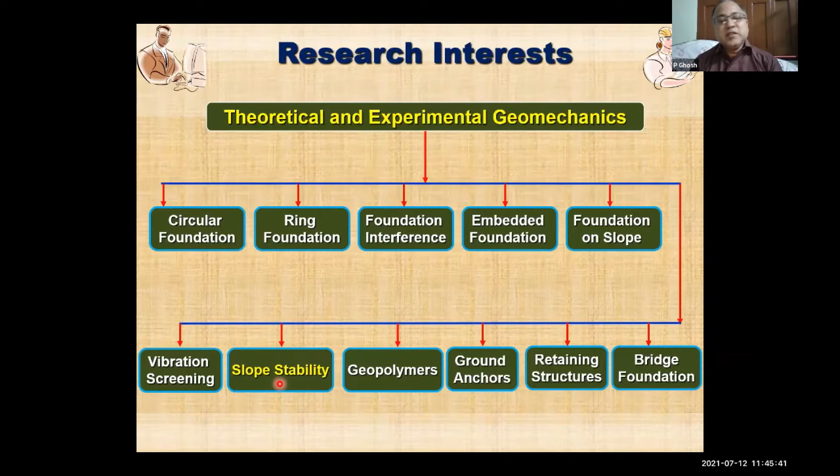I mainly work in theoretical and experimental geomechanics. Today I am going to focus on this topic, slope stability, where the slope is reinforced with micropiles. Now why this topic? What has motivated us to work on this topic?

The stability analysis of natural and human-made slopes under seismic condition remains a challenging task in the field of geotechnical engineering. As we all know, a lot of researchers are working on slope stability, and we know that landslide, slope failure, embankment failure, these are the part and parcel of a geotechnical engineer, right?

The failure of slopes under any condition may lead to tremendous loss to the society, which advocates for improving the soil to enhance the stability of slopes.

Out of various ground improvement techniques, there are several, such as geosynthetic reinforced ground improvement techniques, or chemical stabilization based ground improvement techniques. There are several techniques, right?

Now, micropiles can be adopted to enhance the stability of such slopes. Let's see how we can place it and get the enhancement in stability. Micropiles are generally found to be versatile, serving various functions such as seismic retrofitting and underpinning. The stability of slopes is expected to improve with the use of micropiles, but the study on the effect of seismicity on the stability of micropile reinforced slopes is limited. That has motivated us to initiate this work.

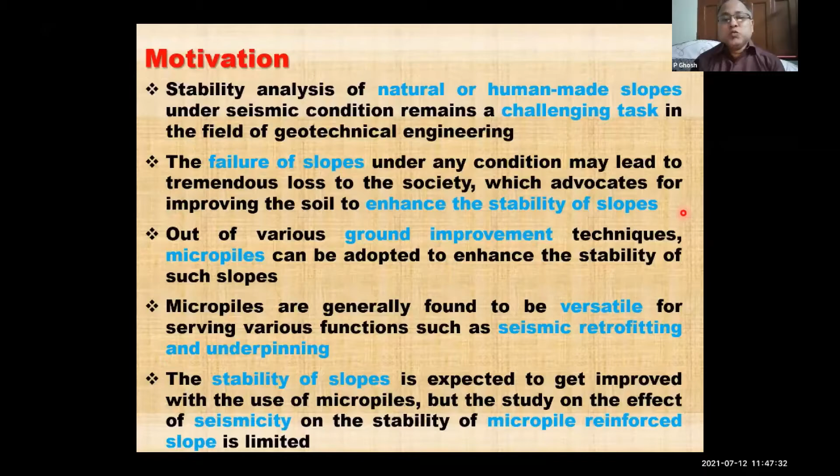Now coming to the problem definition and objectives of the present work. The problem definition is a finite slope of height H and inclination I, reinforced with vertical as well as inclined micropiles, considered under static and seismic conditions. The mechanical properties of soil include the angle of internal friction, cohesion, and unit weight of soil. So we considered both C and phi parameters—it is not a purely cohesive soil slope, rather it has both present.

The limit equilibrium method—we know there are several numerical techniques by which we can obtain the stability of a slope. However, we have used the limit equilibrium method for this study, coupled with the original pseudodynamic approach, which was originally proposed by Steedman and Zeng in 1990. Later, several researchers worked on that and improved the methodology. So these two things are adapted in the analysis.

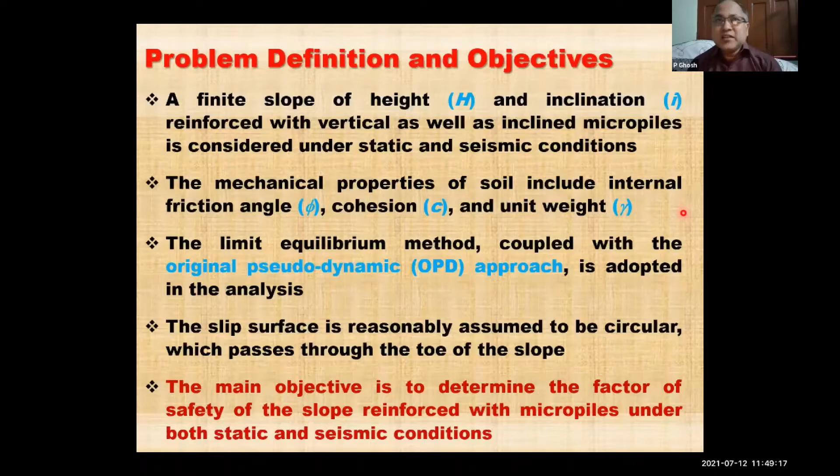The slip surface is reasonably assumed to be circular, which passes through the toe of the slope. So we are assuming that the slope fails through toe failure only. The main objective is to determine the factor of safety of the slope reinforced with micropiles, under both static and seismic conditions. This is the basic objective of the present work.

Now coming to the failure mechanism adapted for this study, and the associated forces for both vertical micropile and inclined micropile. Here you can see this is the finite slope, and this is the slope surface. The slip surface, which is reasonably circular, we assumed. And this is the micropile—this is the vertical micropile, and in this figure, this is the inclined micropile.

The seismic inertia forces, like vertical and horizontal seismic inertia forces, are calculated based on the original pseudodynamic analysis. We considered the wave velocities, like shear wave velocity and primary wave velocity, and also the amplification of seismic activities from the base of the slope to the top.

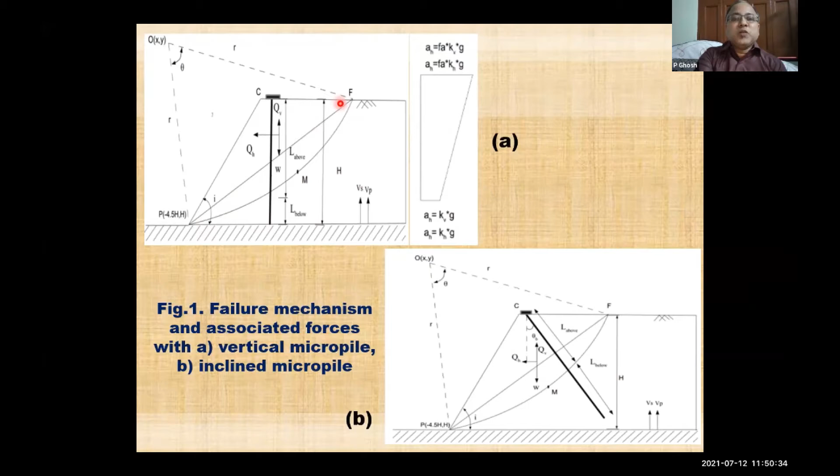Now we consider the slope is resting—so these are the assumptions we are coming to. This slope is resting on a reasonably rigid layer, and the height of the slope is H, capital H. This is also finite.

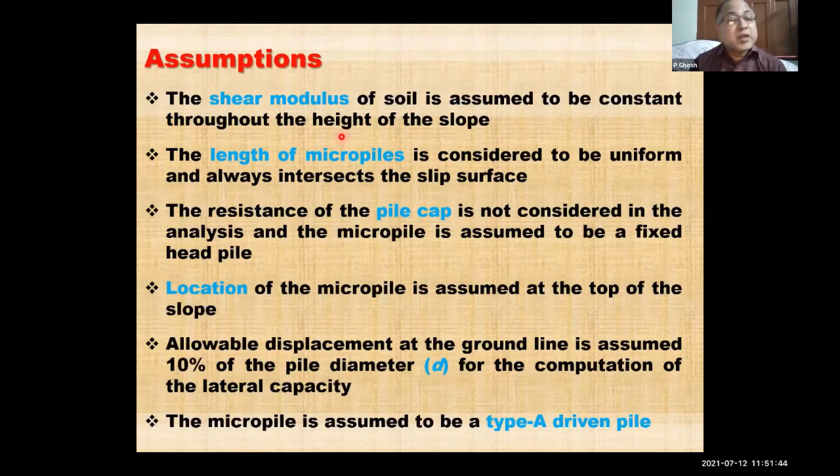Now coming to the assumptions, as I told you, this is the initial work we started, so to begin we need a few assumptions, and we are working on relaxing these assumptions in subsequent works. The shear modulus of soil is assumed constant throughout the height of the slope. The length of micropiles is considered uniform and always intersects the slip surface. The resistance of the pile cap is not considered in the analysis, and the micropile is assumed to be a fixed head pile. The location of the micropile is assumed at the top of the slope. Allowable displacement at the ground line is assumed to be 10% of the pile diameter for computation of lateral capacity, because we need to obtain the capacity of the micropile to include in the analysis—so we need to assume something regarding the serviceability of the micropiles. The micropile is assumed to be a type A driven pile.

Now coming to the methodology. We calculate the seismic accelerations based on the OPD approach proposed by Steedman and Zeng in 1990. We considered the horizontal acceleration through this expression and the vertical acceleration through this expression. Here, if we remove the amplification factor FA, or remove the time dependency of the wave, it boils down to the pseudostatic approach, which is well known in the community. Through these two equations, we calculated the horizontal and vertical seismic accelerations, which were included in the analysis.

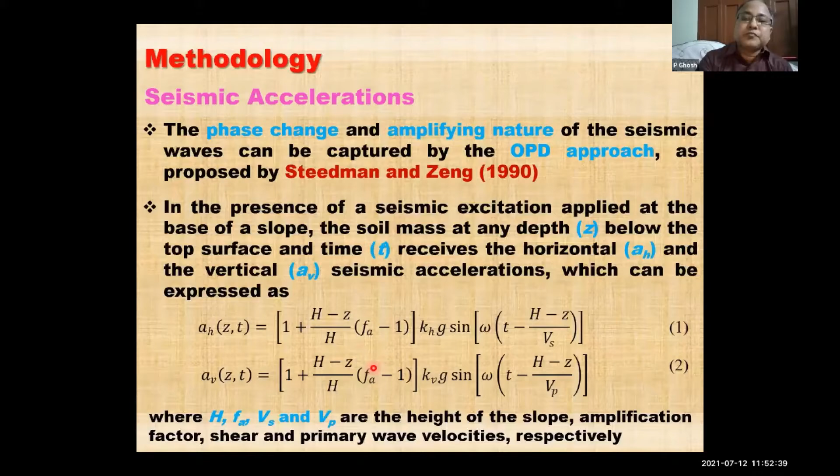Now coming to the stability analysis with vertical micropiles. The detailed derivations I am not going to show here, that is available in the paper, so interested people can refer to it for the derivations. However, by considering the equilibrium of forces, the factor of safety can be expressed by this expression, where you have the soil resistance, the micropile resistance, and the seismic forces, inertia forces, and the weight of the soil chunk or soil wedge, which disturbs the slope stability.

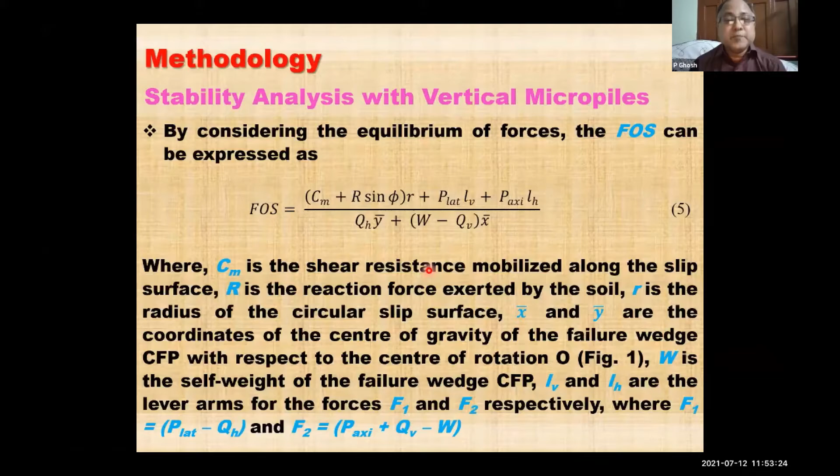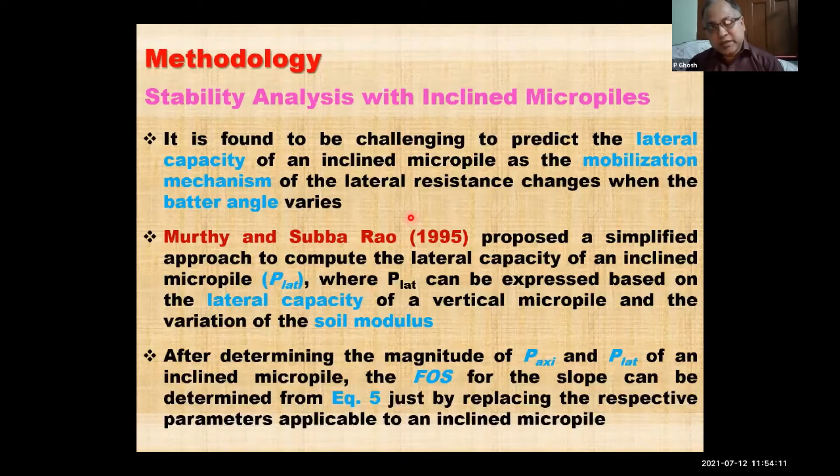Now coming to inclined micropiles, though everything remains the same, only the lateral force calculation in inclined micropiles is a bit different. That we have taken from Murthy and Subba Rao 1995 paper, and based on that we determined the lateral capacity of the micropile. After getting reasonable expressions for P axial and P lateral for the micropiles, we use the same equation shown previously for vertical micropiles. So by calculating suitable values for the inclined micropiles, we can use the previous expression for getting the factor of safety.

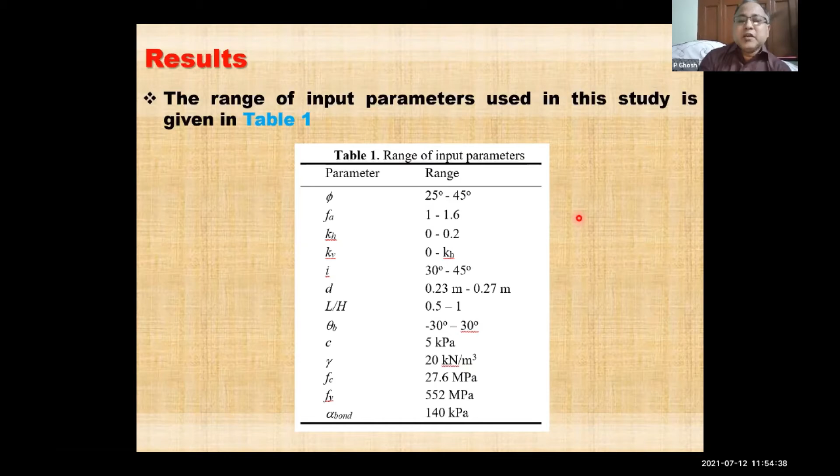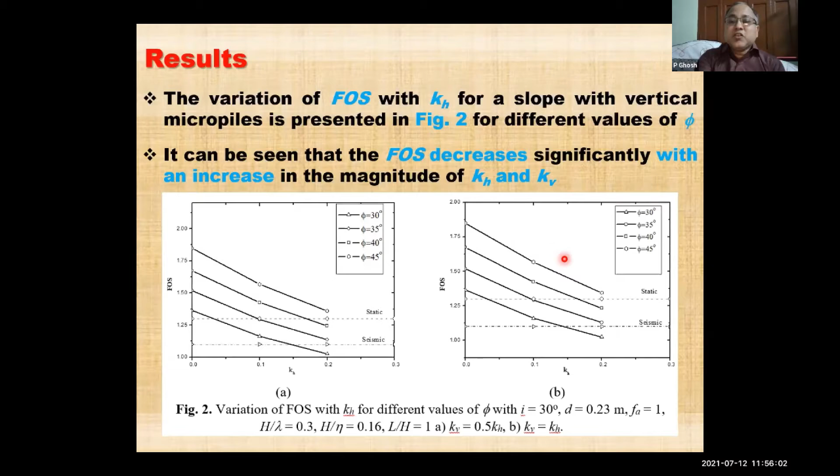So this is for different values of phi. This is also for different values of phi, but we are having different values of seismic acceleration.

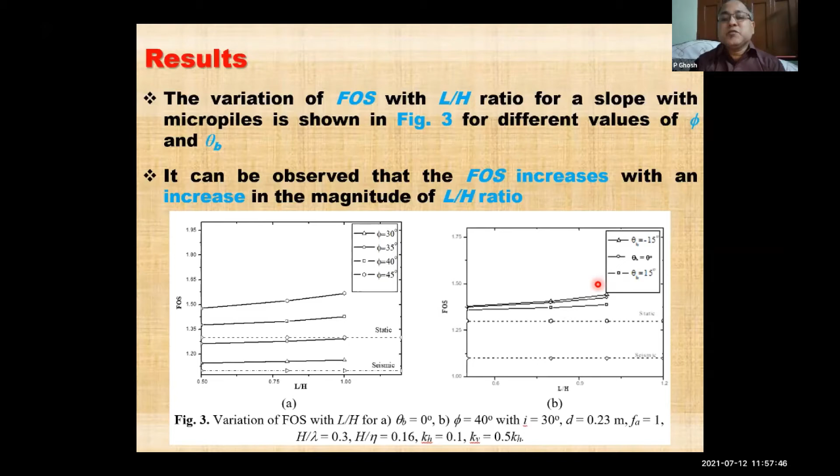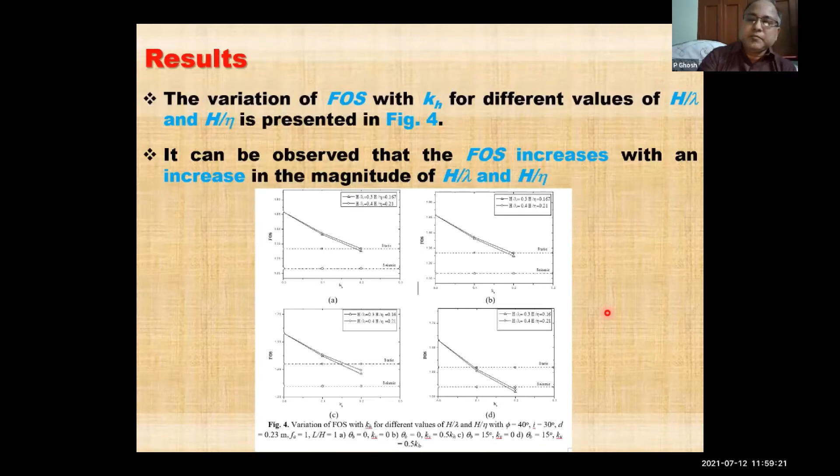Factor of safety increases with increment of H by lambda. That means if the seismic waves travel faster, your factor of safety goes down. If it takes a little bit more time to reach the top surface, then your factor of safety increases.

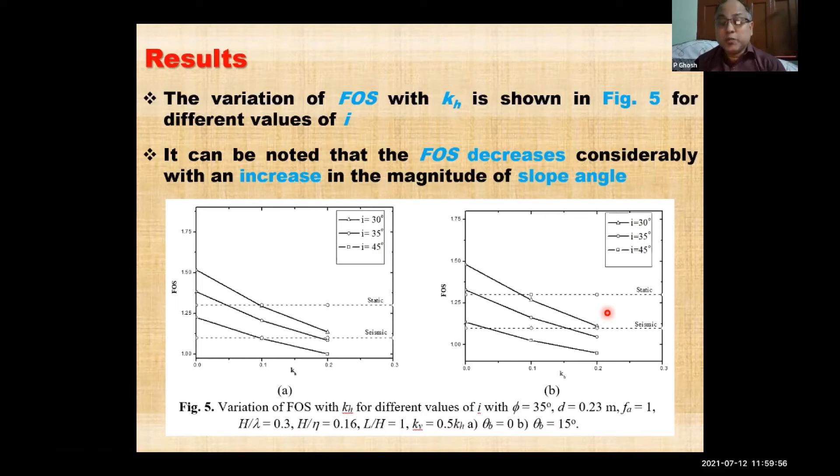Now coming to the variation of factor of safety with the slope angle. The trend is similar to what other researchers have already obtained, but we quantified it. As your slope angle increases, meaning the slope becomes steeper, your factor of safety decreases, which is quite obvious. But we quantified how much decrement or enhancement happens with variation of the slope angle, and of course with the use of micropiles.

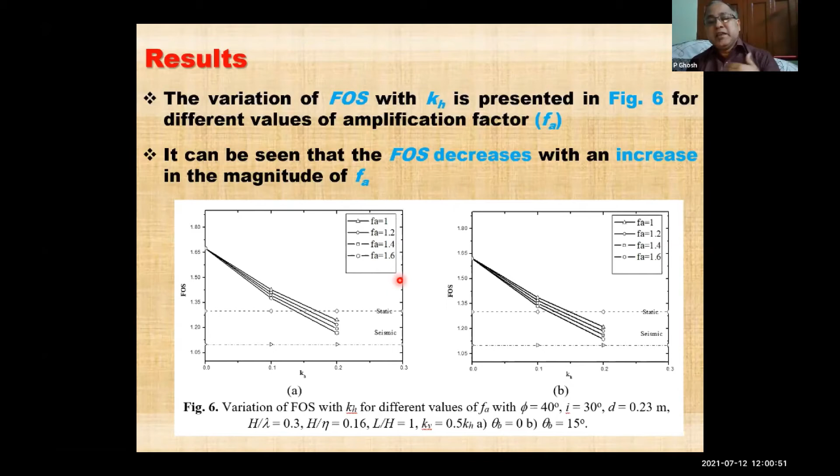Now coming to the variation of factor of safety for different values of amplification factor, FA. Factor of safety decreases with an increase in the magnitude of FA. FA values used are 1, 1.2, 1.4, 1.6, because this amplification factor depends on so many factors like ground condition, soil condition, and type of shaking. We only chose the coefficients; these values were not selected from any site-specific case. Anyway, as FA increases, your factor of safety decreases.

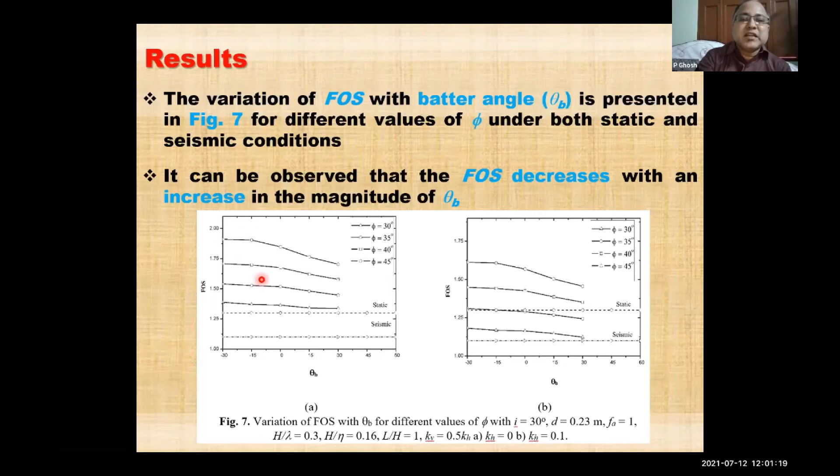Now coming to the batter angle. As your batter angle increases, going from negative to positive, your factor of safety decreases. That means if the inclined micropile comes nearer to the top slope surface, your factor of safety decreases. Initially it remains almost constant.

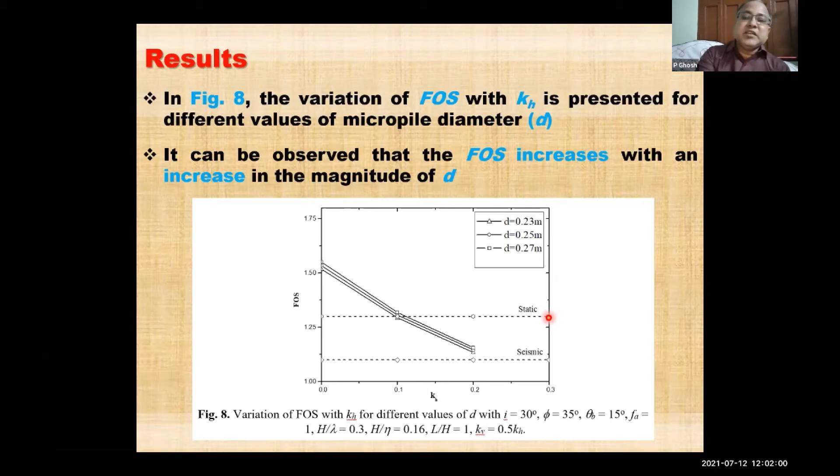Now this is the variation of factor of safety for different values of micropile diameter. We did not assume the inertia force of the micropile, so we restricted the diameter to between 0.23 and 0.27 meters. We could go to a higher diameter, but then we cannot ignore the inertia force of the micropile itself, so we restricted it here. We are working on including the inertia force of the micropile in future studies. Anyway, as diameter increases, your factor of safety increases.

Now coming to the comparison. Unfortunately, we didn't get a proper comparison with micropile reinforced slopes under seismic condition, which restricted us to comparing our present results without micropile. We compared with the basic and conventional seismic analysis, that is the pseudostatic analysis.

We compared with Choudhury et al. 2007, and we can see that the present results are found to be a little higher than Choudhury et al. This is because pseudostatic analysis gives conservative, and hence safe, results. But this will always give you the conservative side, and that is getting reflected from this figure. This is the variation of factor of safety for different values of phi under static condition.

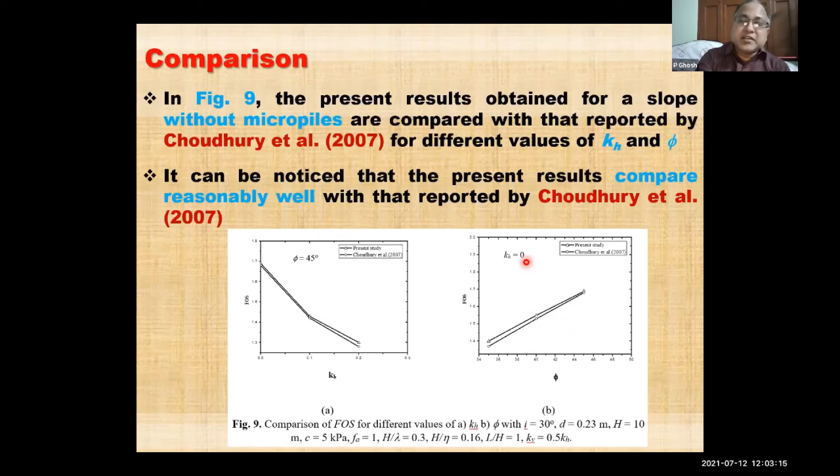Now coming to the summary part. I am not going to say conclusion, because the work is still going on, so we are not in a position to give the final conclusions. But anyway, we can summarize our work as presented.

The factor of safety for a slope reinforced with micropiles decreases with an increase in the magnitude of KH and KV. The factor of safety increases with an increase in the length of micropiles. The magnitude of factor of safety decreases with an increase in FA, the amplification factor, but increases with an increase in H by lambda and H by eta.

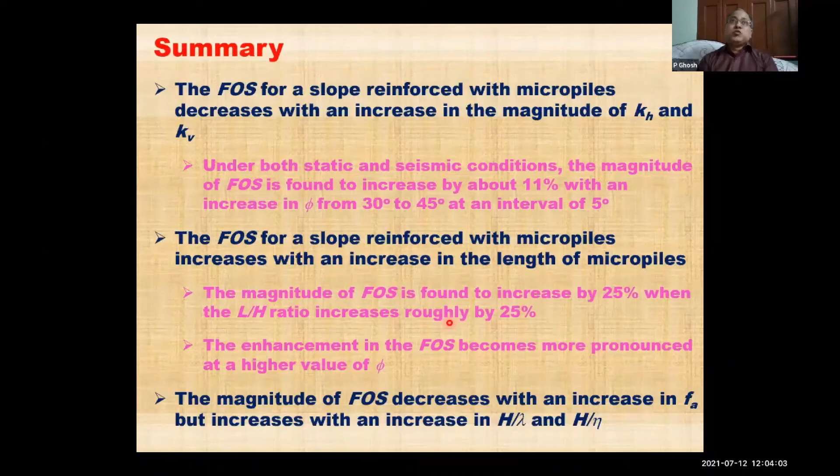That means the time taken by the waves to travel from the base of the slope to the top of the slope. Under both static and seismic conditions, an increase in the diameter of micropiles from 0.23 meter to 0.27 meter results in around 3% higher factor of safety. Under seismic condition, inclined micropiles are found to be more effective than vertical micropiles, as we already observed.

The factor of safety generally decreases with an increase in the batter angle of micropiles, as we observed. The factor of safety for a slope reinforced with micropiles is found to be conservative for the pseudostatic approach compared to the original pseudodynamic approach.

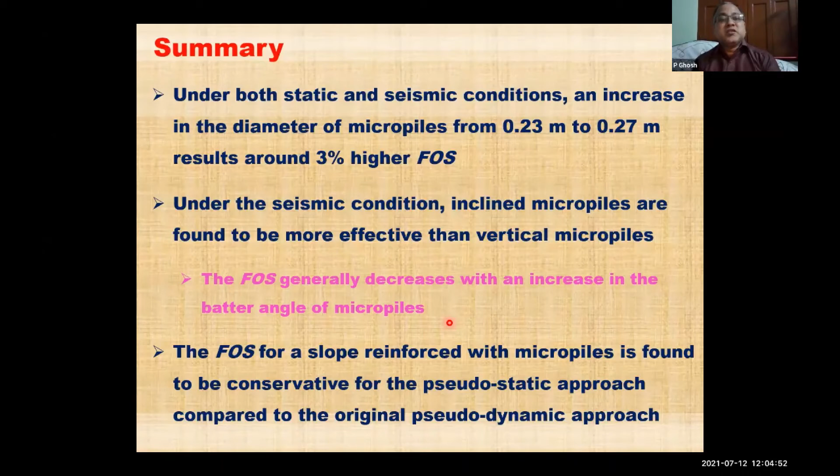Now I acknowledge the work was done by our previous MTech student, Mr. Surya Kumar Pandey, in collaboration with my colleague, Professor S. Rajesh.

Thank you very much for listening. Is there any question? Thank you, Professor Ghosh, it was indeed a very nice presentation, very interesting.

But in all these cases, what is the saturation condition, any saturation or wetting due to rainfall? At this moment we didn't consider water, the water-soil interaction. If we consider that, we need to obtain the excess pore water pressure, which would be disturbing the stability. So that is another assumption in this particular slope, that everything is in dry condition and there is no interaction of water at this moment. That is another scope of study, where we can include water and see how pore pressure affects the stability.

Of course, it is highly impossible to maintain that dry condition for a long period of time, so naturally the factor of safety will be varying. Without water, of course water is part of it, there is no other way to avoid it. Water will be coming and that will seriously affect the stability, but in this study we didn't consider it.